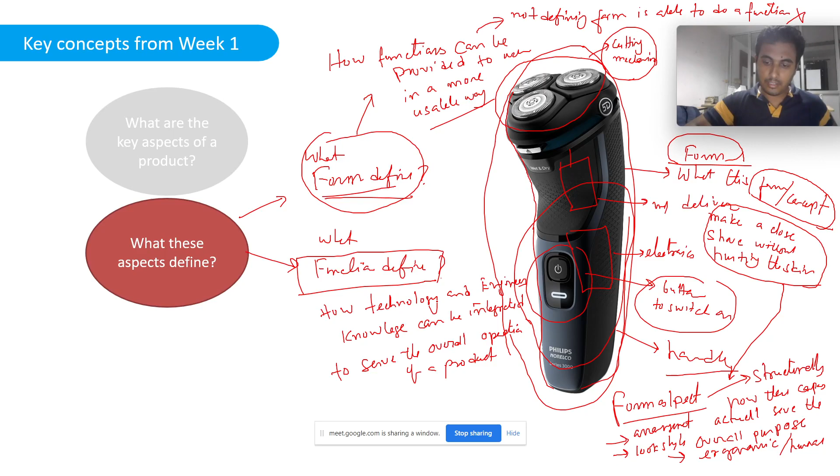So if you see, in early days, if you go to the barber shops, you have a wooden handle and there is a steel knife. This is like a wooden handle, and then we have a steel blade. I think only boys will know these things better. Even girls also will know this.

Okay, so what are the solutions before this? Can anyone tell? Let me tell you that before this, people used to use their household knife to shave their beard. And then we have these particular tools which are used by barbers. So who is the user? Barber. So the user here is the barber, and you will get these in saloons only most of the time.

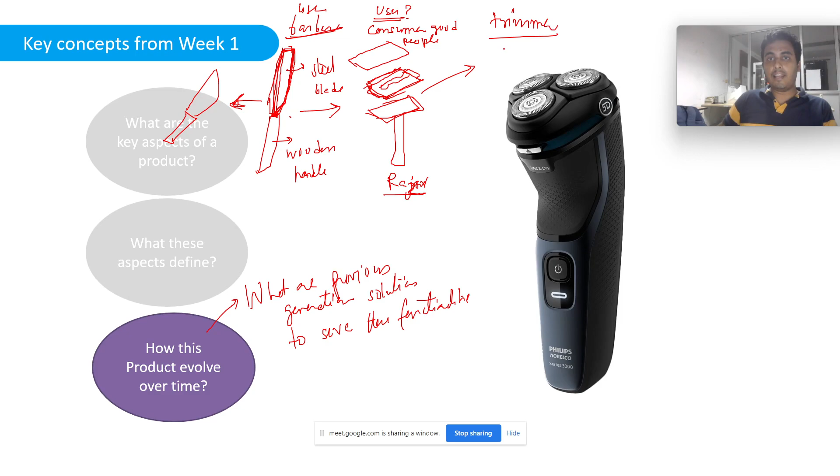After that you have these versions, where you have a trimmer, and then you have a shaver, and these are electronic or electric. And these are again for consumers. So these are consumer products, consumer grade products.

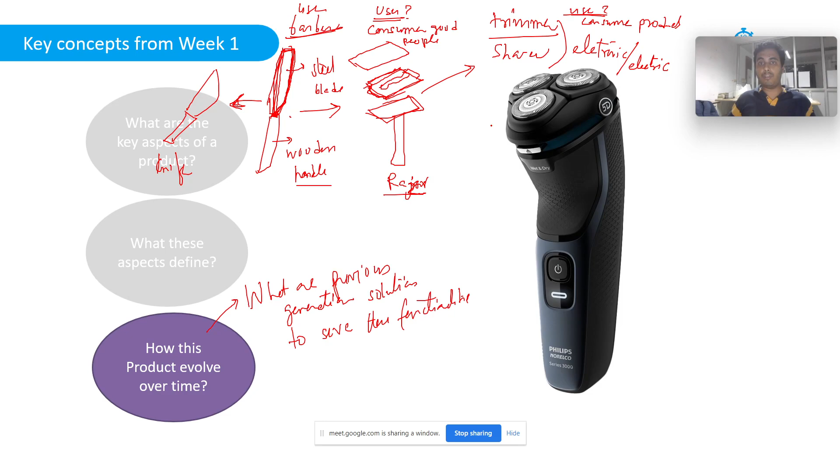Tell me why this particular product evolved to the current state. Why we have a knife, then a wooden handle, then a razor, and now this state-of-the-art electric shaver. So what is the requirement, and why is there an evolution? Okay, RUC says save time. I'll just try to write your comments so that everyone can see. Someone like RUC says it is for saving time. Any more replies?

Okay. Madhusudan said effectiveness. Now these are very vague terms; you need to be a bit specific. Effectiveness in terms of functionality or in terms of usability, a lot of things are there. So effectiveness is a very generic term. Actually, most of the time we call effectiveness from the perspective of engineering efficacy, and that's where we define it as engineering efficacy.

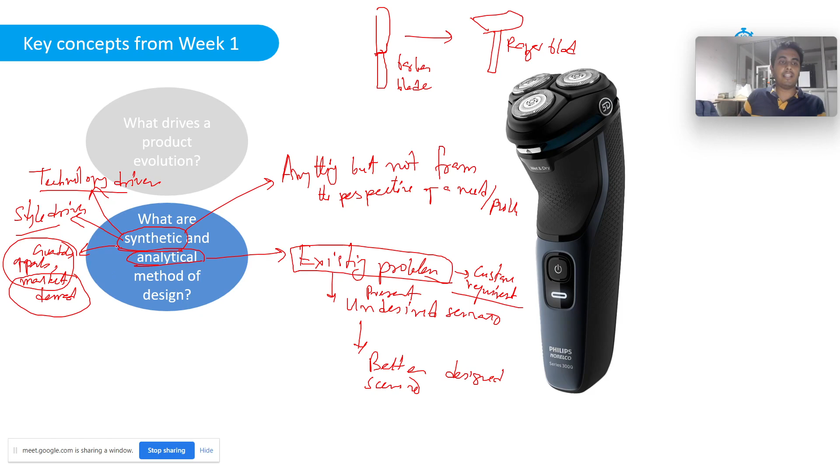Then there can be other ancillary requirements, like availability of parts, then market demand, which is higher profitable. So based on those also, if you design, it is again a synthetic method of design.

So now we have covered some of the basic concepts. Do you remember this particular model? Can you tell me what these missing ellipses suggest, like this orange color ellipse - what should be there? Please try to answer this.

So orange is basically knowledge. First is related to engineering design, second is related to industrial design. Function - yes, these are outcomes.

And what about red? Need. Engineering function, and then need. And here, evaluation. Okay, Madhusudan, you are right, but you don't club engineering design and needs together. And again here, when you say function, don't define function and form here because these are outcomes.

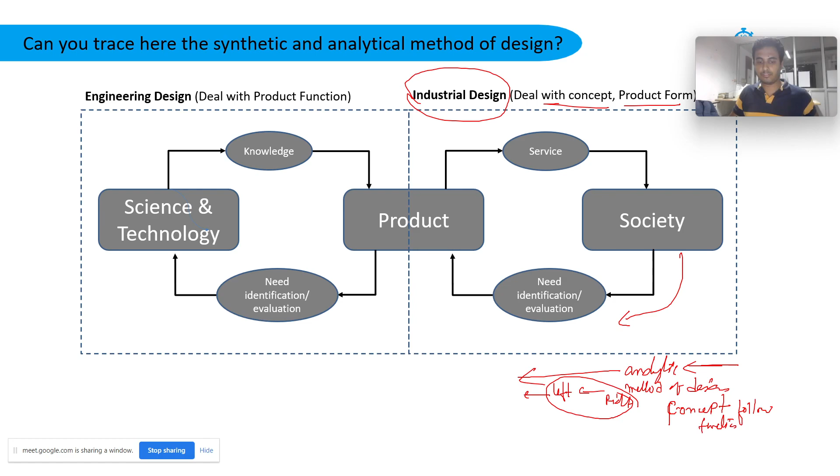Sorry, this is the opposite one. Okay, so this is also called function follows form, because you come up with the concept first and then you come up with the function, and then we sandwich them together to do the product design. So this is function following the form.

The other part is the synthetic part, where, because there is a technological leap, you come up with the functional design first. Product functional design or innovation happens first, and then you try to come up with the form or the concept. This is what is also called form follows function. Am I clear?

So tell me one thing, like you have an aircraft, okay, a super fast one like a Rafale. What do you think the design of this particular nose is - is it a synthetic design or an analytical design? So we have the nose of an aircraft, right? Or again we have the wings, so they also come with certain profiles. So what do you think, is it a concept driven product, a need driven product, or a technology driven product? Technology.

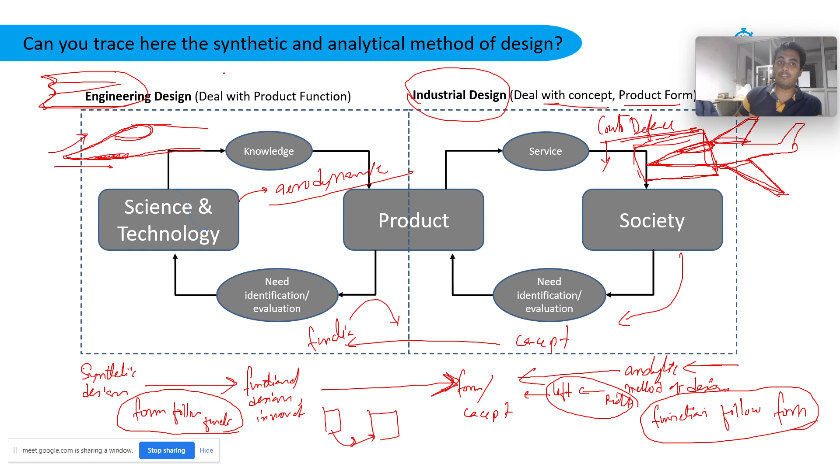So basically what I am trying to say here is that the particular form that people come up with for an aircraft is something called form following the function, because these forms are highly influenced by the role of aerodynamics. Because if it were purely driven by concepts, in the past we had different kinds of concepts, like alien-ship kind of concepts in designing aircraft. We can have a different design for the tip of a ballistic missile, and a different design for the tip of an aircraft, because you also need the requirement of having visibility. It's not like a missile which can just be a round or dome kind of structure. Okay, so these are highly influenced by what technology defines, what the requirement of aerodynamics is. Okay, so this is how you try to distinguish what drives this particular design.

Okay, even the wings of the aircraft are designed in such a way that you have low drag, and you can get lift when you move forward. Okay, so there's a science behind it - whenever air flows, this air reaches there faster, this air reaches slower, so a vacuum is created, then there's lift. So these are all driven by the technology, the functionalities.

Okay, so we already defined what is engineering design and what is industrial design, marking these two particular areas. This is engineering design and this is your industrial design, also called conceptual design, represented as form. This is also functional design, represented as engineering design or product function.

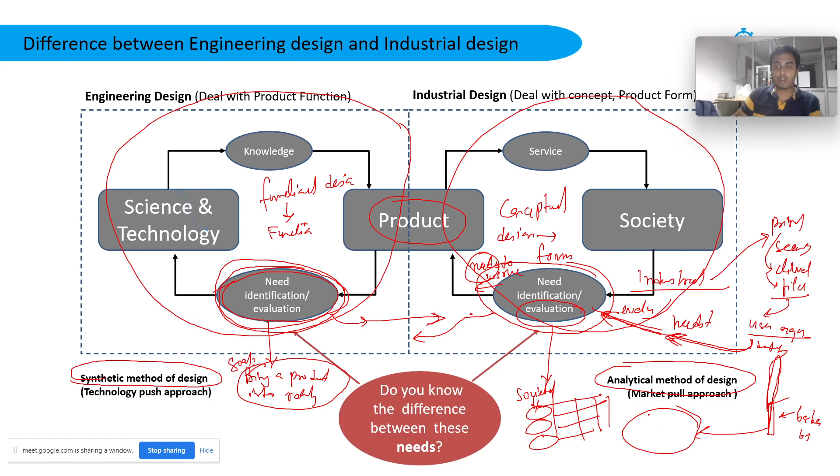So to bring a product into reality, you have concepts. For example, the example of a shaving thing, right? I'll give the same example. So you have that previous barber blade. Then we come up with such a set of requirements, and the nature of these requirements are qualitative. If you see, these are qualitative, like should not cut, easy to handle. So the nature of these requirements is qualitative in nature.

However, you again derive quantitative measures to actually come up with certain concepts. However, concepts are intangible, they're not actually solving the purpose. At the end you need to deliver the particular product in reality. So based on the concepts you come up with, what are the engineering requirements? This is where you try to figure out the engineering requirements to fulfill this particular concept. What sort of engineering modalities, science and technology, or knowledge domain expertise will be required, those will be the needs of this particular area.

And that's where we search in the space of science and technology, and we come up with knowledge or functions, and then we use them to come up with a product design. Okay, now this example I have given as an analytical method of design.

I come up with the problem from this side. But the example can be also from the other side. We have something like AI. For example, nowadays we have conversational AI. Conversational AI means those chatbots, like chatbots you use on websites.

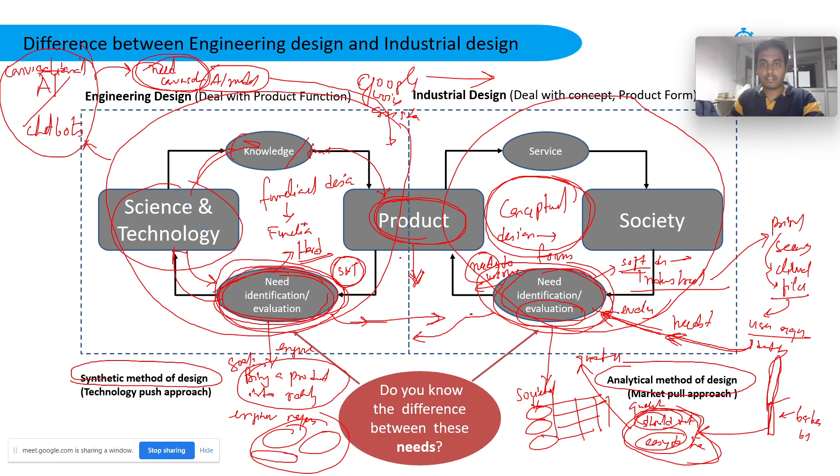So let's give an example. This is one of my works in the industry. I was in the industry for around 10 years. I was a lead designer in Tata Elxsi, and also I had two startups in the space of medical design. This example I'm trying to give from the perspective of an analytical approach to design, to show the nature of a societal need.

The problem is that you might have seen the shampoo sachets which are available in the form of strips, like Dove, Sunsilk. However, those are available only in small grocery shops or kirana shops. So these are available only in small shops.

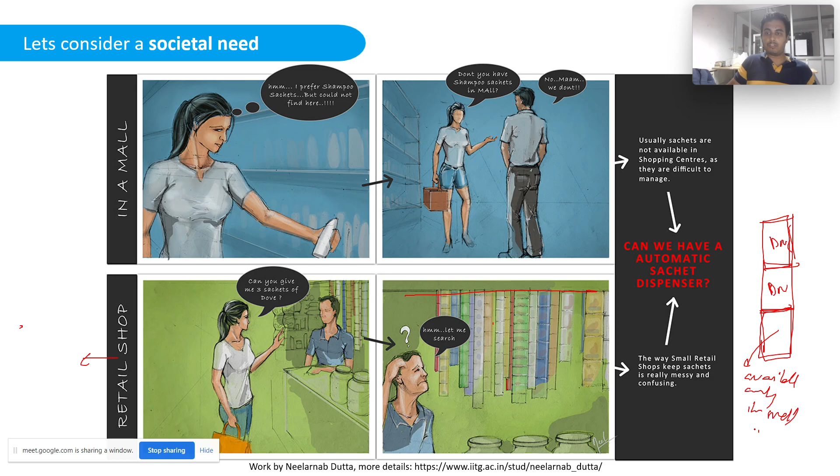And if you go to a mall, you will find most of the time these shampoo bottles, which are expensive if you compare the quantity of shampoo you get inside them. However, you do not have the option to get sachets there. So no sachet strips.

So we did a field study back in 2013, and we came to know about this scenario. We were given the problem that it is hard to manage these kinds of sachets because, for example, there are 40 companies and they have different sachets, and managing them in a mall is really cumbersome. It's not easy. You need to have a particular shelf, and also billing them.

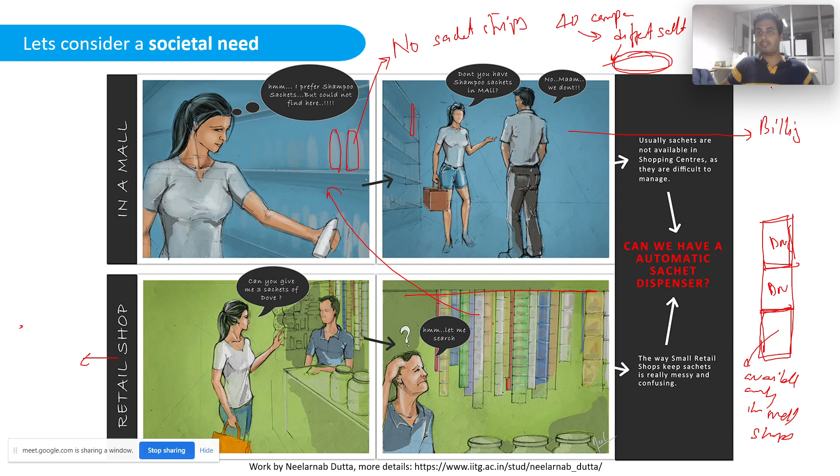Billing sachets here is a problem. So I will just try to write down the issues. You have a billing issue because people can take X amount of sachets, so you have to count individually. And there are chances of tear, and shampoo can come out of the sachet. So it's not a very hygienic business to be adopted in a mall scenario.

So that was the problem. And the requirement that was identified was: why can't we have something like an automatic dispenser that will store sachets and also dispense sachets as per user requirement? So this is the requirement. The nature of a societal need is more qualitative. This solution later can be used in both scenarios. So that was the agenda.

Now let me give you an example of the industrial design outcome. The nature of an industrial design outcome is, as I told you before, concepts. Concepts means ideas. Generally in the industrial design phase, we create a lot of concepts, and out of those, we select particular concepts which fulfill and satisfy all those societal requirements.

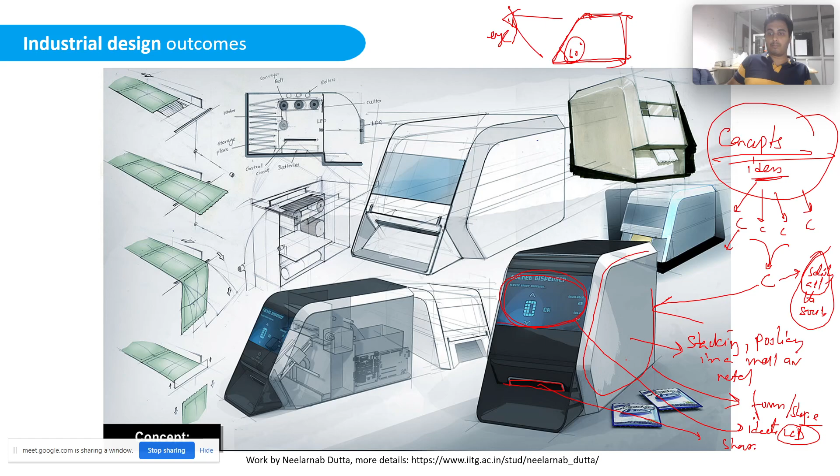The other requirement which the industrial design person tries to ideate is that the machine should be able to dispense sachets of any number. So these are like desires. That means the designer does not have a real solution for all this. He does not know how to achieve this, but he desires, as an industrial designer, that the sachets should come as a user-defined number here. If a person says 3 sachets and he presses OK, then 3 sachets should come, something like that. So this is some kind of concept, and that person tries to define this in this particular form factor.

Now there are style elements, styling, which are also an outcome of industrial design, because styling matters, because you want to make this particular product competitive against other products. Tomorrow if different products come, your product should stay competitive. So these kinds of decisions can be taken care of by industrial design by working on the aesthetics. So aesthetics is one of the things that they take care of. And apart from that, they also can think about simple ideas of how this can be implemented. And this is not something very complicated. This is what an industrial designer can actually think about.

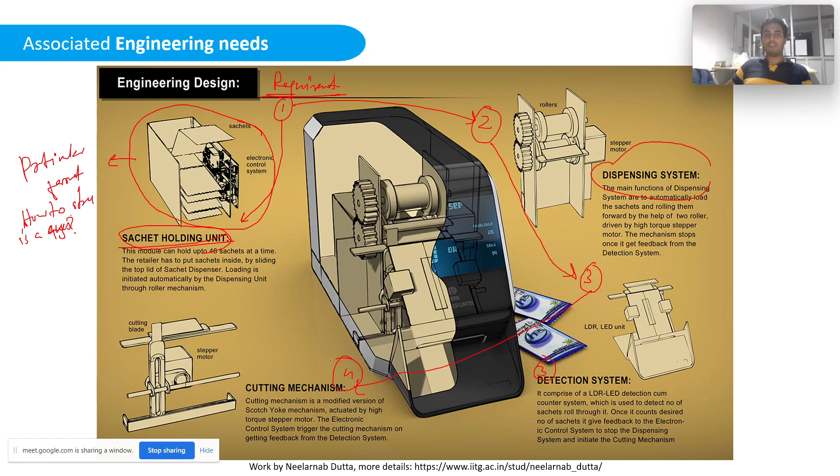As per his requirements, he thinks that to solve these particular concepts, he needs to come up with a sachet holding unit, a dispensing unit, and some sort of detecting mechanism. This is like a detection mechanism. And then he should have something for cutting the sachets. Okay, so these are the requirements.

And what are the reasons and how does he come up with these particular requirements? It is all based on his knowledge of science and technology and his domain knowledge. So that's why engineering design needs engineering knowledge, scientific knowledge to come up with these sorts of requirements and solutions. For example, for a dispensing mechanism, the person should have knowledge about gears, levers. He needs to know how much torque is required to push that particular sachet.

For the sachet holding unit, the person needs to have knowledge of the dimensions of the sachet. So he needs to consider the dimension and how to feed this. And if this is a particular sachet chamber, you should also be able to bring this out of this particular unit, so that whenever the sachet goes empty, you are again able to fill this.

It's like how in an ATM machine, a person accesses the ATM machine and fills the new currency notes. Okay, so a person needs to think about how to bring this particular chamber out of this unit. That means he needs to think of this as a modular unit. All these decisions are taken care of at this phase, the engineering design phase.

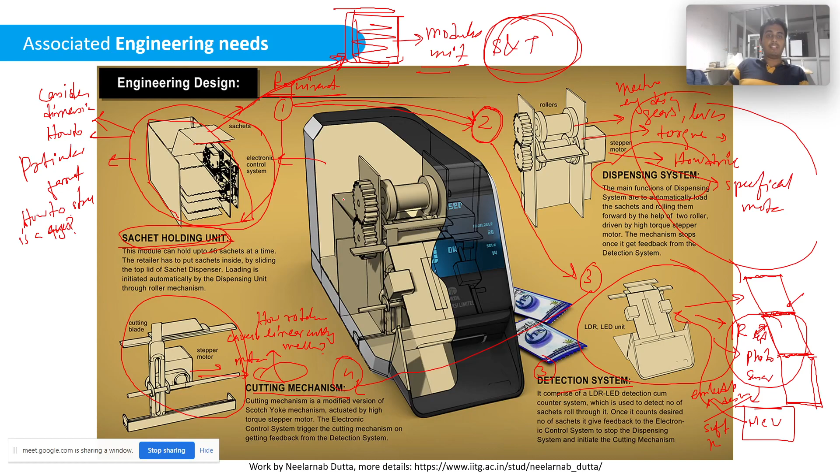And above all, you also need power circuitry to actually control it. So all these requirements come from engineering design requirements. So the nature of engineering requirements is like this, and this is the nature of engineering outcome. Okay, so what we have are prototypes that actually represent the concepts, and we have hand skills involved.

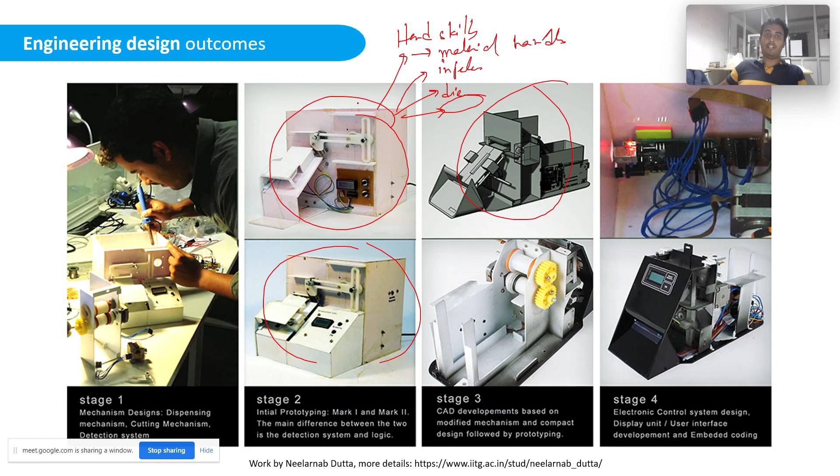So material handling capability depends upon what kind of material we are using. This is a prototype, but in commercial, it could be injection molding, a die, or something like vacuum forming. So all those decisions are taken at this engineering design phase, and as an outcome we can have these low fidelity prototypes, and these are high fidelity prototypes. And these again need knowledge of CAD CAM to arrive at the final product. So this is the final product.

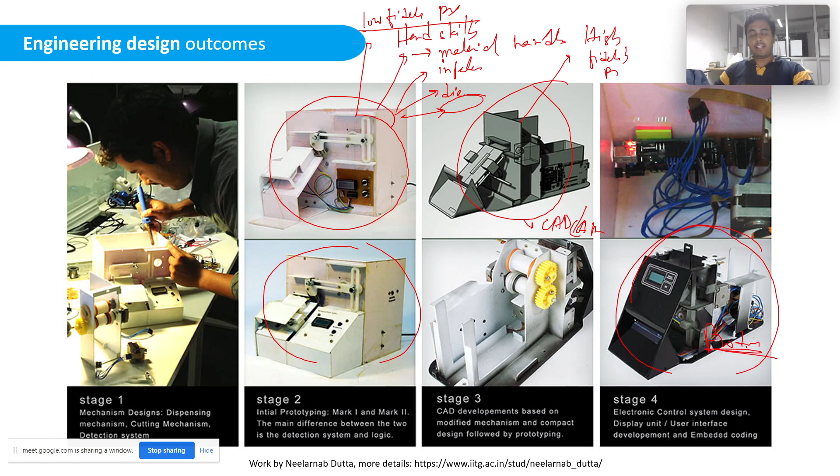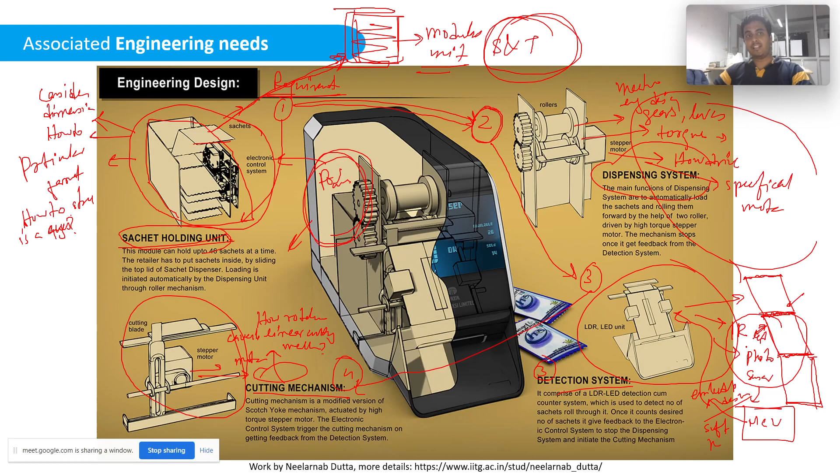So what I'm trying to make you understand here is the nature of a need, a societal need, the nature of an industrial design outcome, the nature of an engineering need, and the nature of an engineering design outcome. Okay, so let's see the product here.

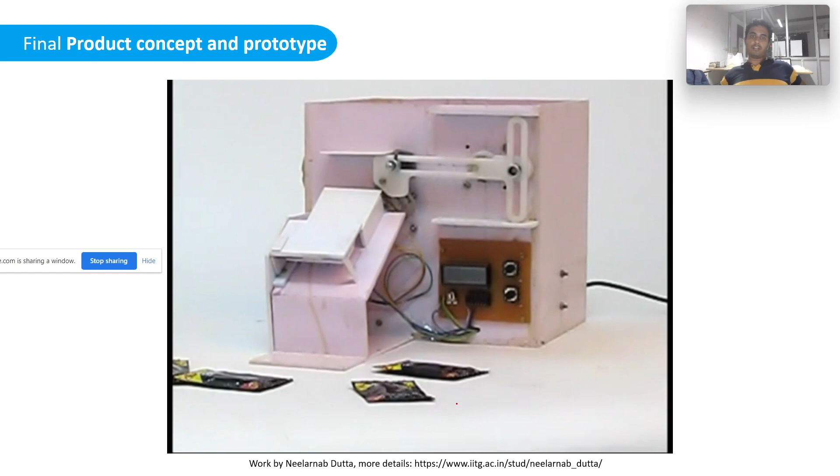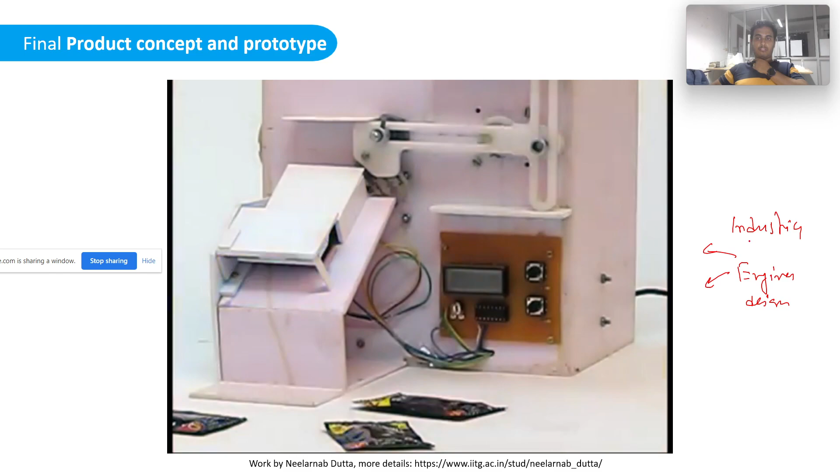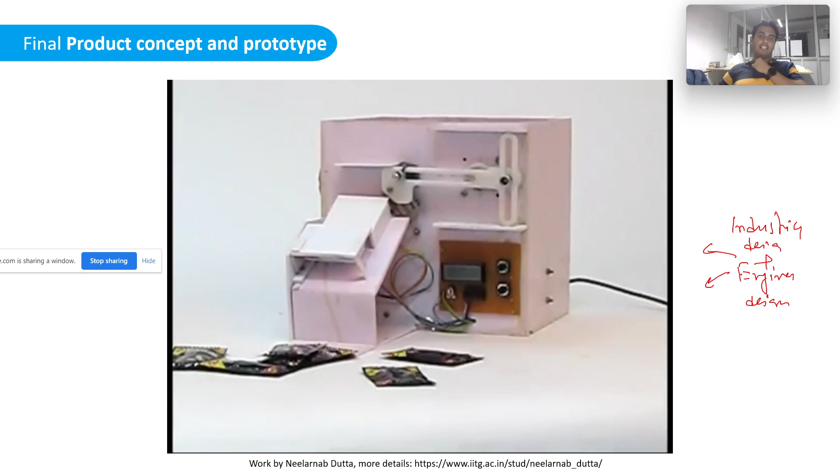This was the Mark 1 version. This was a low fidelity prototype, and I did the overall engineering mechanism, both the industrial design part as well as the engineering design part. So the initial prototype can cut one sachet at a time.

So later I did some sort of software upgrade and changed the dispensing mechanism also, and then the system was able to cut multiple sachets at one go. So if I say 2 sachets or 3 sachets, it should be able to cut multiple sachets in one go. So this is again an outcome of an engineering design process.

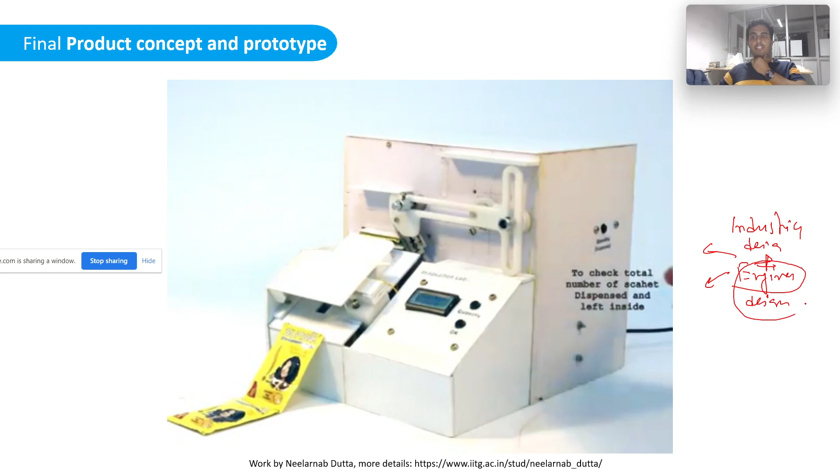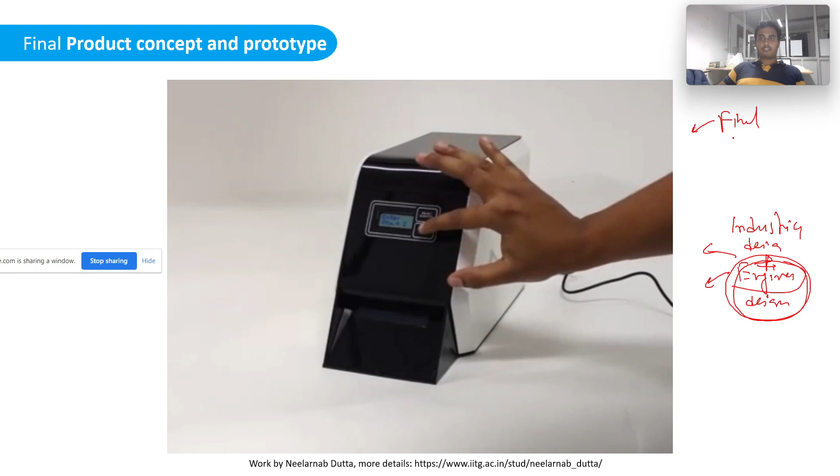This is the final prototype, and this also involved CAD CAM, then injection molding, CNC machining. So this is the final. Okay, this is a high fidelity one.

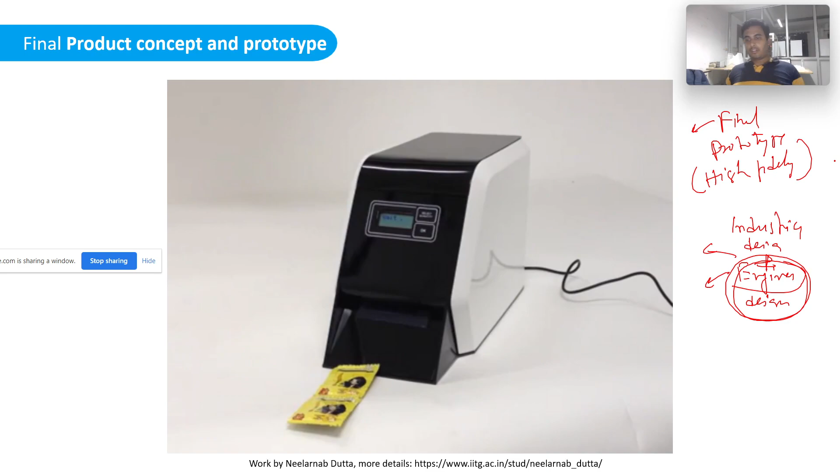Okay. Okay, so that's the end of today's presentation, and just at the end, I want you guys to understand how to map this particular design project into the model we learned in week one of this lecture.

So what we see here is the societal problem, and then we have these requirements, and as an outcome the nature is a concept. There can be other concepts also, and these are like this. That's what we understood. And then we have here the conceptual requirement.

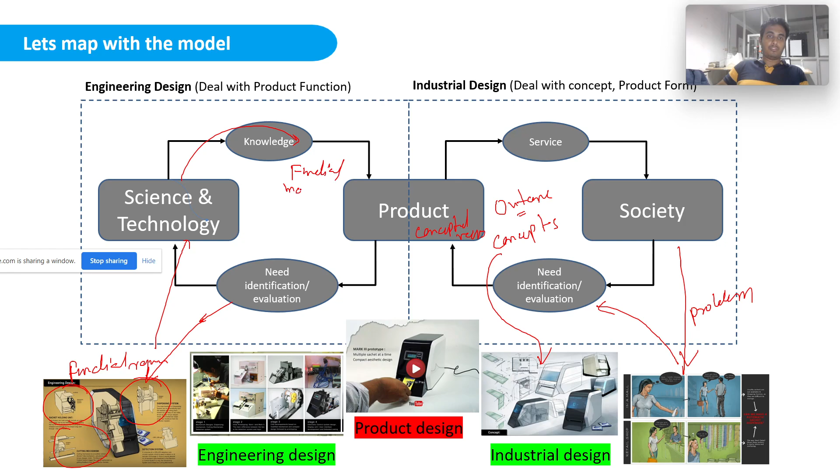The next thing we require is an engineering set of requirements. For the engineering set of requirements, we go to science and technology, and the engineering requirements we ideate first. Let me erase this. We come up with these sort of functional requirements, and then we search them in the space of science and technology, and as an outcome we come up with functional modules or knowledge.

You use the conceptual design as well as this functional design, and together we have the product design, and that's your final product. I hope I was able to give you some of the key concepts from week one of this syllabus, and if you have any doubt, please feel free to ask.

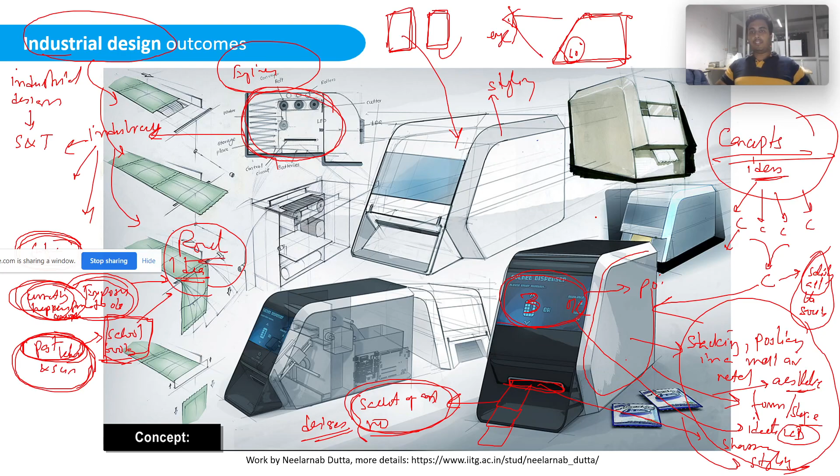Sir, I have one doubt. Yes, please. Here, industrial design means is it 100% conceptual design? So that's what I just tried to define in the industrial design phase here. Ideally the nature of an industrial design outcome should be this: a person tries to come up with a concept, meaning ideas, as I told you before.

Sorry, your voice was actually not audible. Can you just write it down? Yeah, the ergonomics and aesthetic appearance are also part of industrial design.

Yes, yes. If there is no aesthetic appearance, the part can still execute its function. So these are not must-haves. A product can have all of these: ergonomics, form, styling, or other things, and ancillary, and then you go to your functional. I did not tell you that you should have all of these. There can be a product which only needs to work on the form. You do not take care of ergonomics.

For example, imagine the safety pin. You just think about how to fold it in this particular form, so you come up with this form as a concept. In terms of engineering design, there is not much. There can be other concepts also, for example a plastic safety pin with a cantilevered portion. Those can also be concepts, but out of many concepts you selected this particular concept.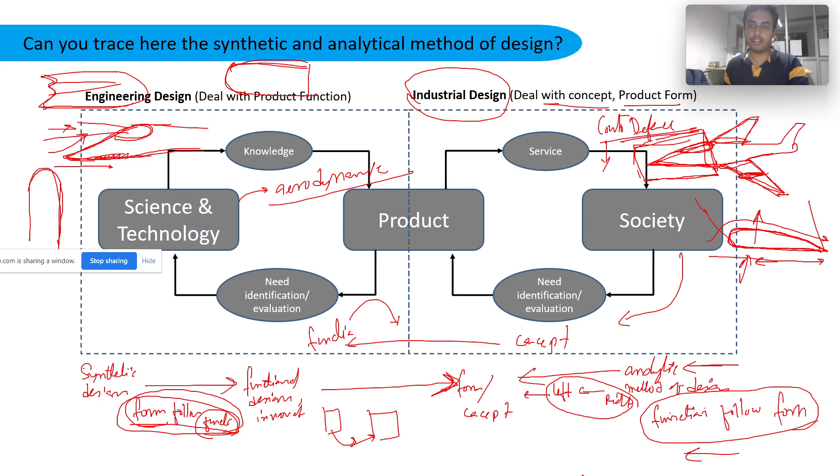And it's not like this is superior, that is inferior. Both side things can happen. And nothing is optional, as you told before; both are important. There are products which require the one side more, and there are products which require the other side more.

So what is the textbook you are recommending, sir, for this? Actually in the syllabus, I just forget the name, the author is mentioned there. Product design, just follow that. That is very important. And also you can refer course material from Professor Amaresh Chakrabarti from IISc Bangalore. He was my teacher when I did my master's in design. His content is on creative engineering design, and you can refer that apart from this particular course also.

Okay, so what is the title, sir? Creative Engineering Design, by Amaresh Chakrabarti. You can search for that. Okay. Thank you, sir.